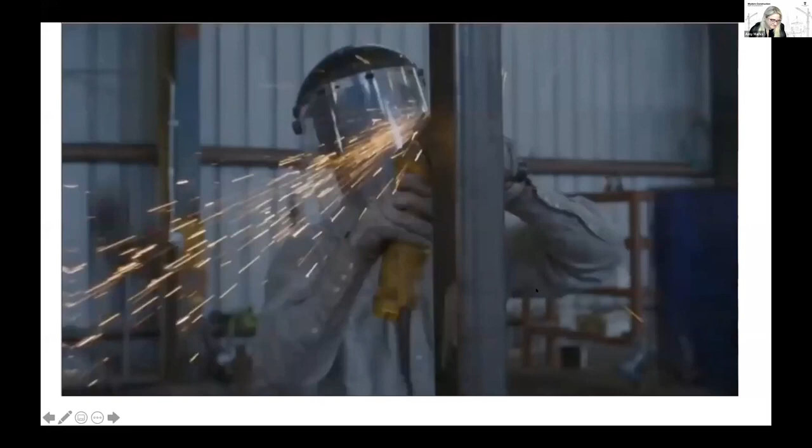So I didn't show that to you just because I have some fabulous shoes, by the way. I have to hear a lot about golf in this ecosystem and industry. So not to show you my shoes, but to tell you that there's a lot of attention around this right now. We posted those videos that are a year old on Autodesk's YouTube site. We have over 3 million views in less than 3 months. 3 million views in less than 3 months. And the majority of our subscribers in those 3 months are actually coming from those video views. And so I think that's really exciting that not only are people watching, they're learning, they want to get involved in this.

I actually work around the world, as we were just mentioning, but I think this really applies to everybody around the world, not just in the United States. You've got to know that this is a global thing that's happening faster than ever right now. And here's why. Technology is really converging. I always say, this is my phone. Can't quite see it. There you go. This is my phone. It's my map. It's my dating app. It's my entertainment. It's everything converged into this thing that I can't live without, that's in my hand all the time.

Right. And we also talk about the fact that design, make, and operate, the processes of that, are actually converging. Those silos don't necessarily exist anymore. And we're getting more and more uncomfortable with those gaps. And we see industries converging: manufacturing, design, and construction. So we don't just talk about how I build things, we talk about how I buy things and make things and integrate things, right? And if you look at what I just clicked up above, it's not just about design, make, and operate. It's about operate, make, and design, as you just heard from Microsoft. There's a reason you're hearing from the owner taking control of the situation.

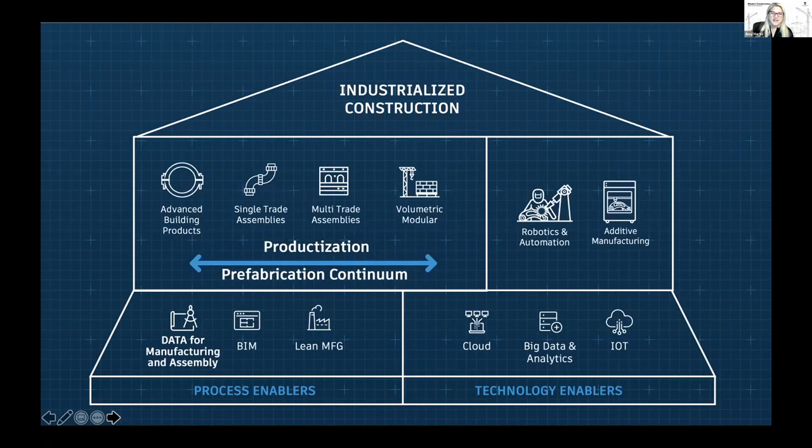Because prefabrication is sort of what happens downstream right now, this continuum. Yes, we have advanced building products and single trade assemblies, multi-trade assemblies and modules, but not the best ones we could actually make, because we allow architects to stretch them, make them taller, shorter, wider, fatter, change the inputs and outputs into something that's not manufacturable sometimes, and not manufacturable efficiently a lot of times. And so we have to, again, apply that verb of productization. So this results in products one day that inform our design, not just are at the mercy of the design.

And if you read the McKinsey report, which a lot of people quote, but not a lot of people have actually read, in my opinion, because I only hear one statement coming out of it, like 45% of our ecosystem is going to move towards industrialized construction. Well, if you read it, they actually talk about the market dynamics changing to more sophisticated owners and more requirements around sustainability, and there are these emerging disruptions. I'm only saying 4, I think there are actually 9. But I said these 4 because 66% of the survey respondents thought that industrialization and digitization are going to be the highest impact emerging trends that exist.

And then those future industry dynamics, 3/4 of the respondents said that the most important thing that happens in the next 1 to 5 years is a product-based approach and industrialization. Product-based approach in the next 1 to 5 years. We're in year 2 of this study right now. What have you done in your business to think about productizing things?

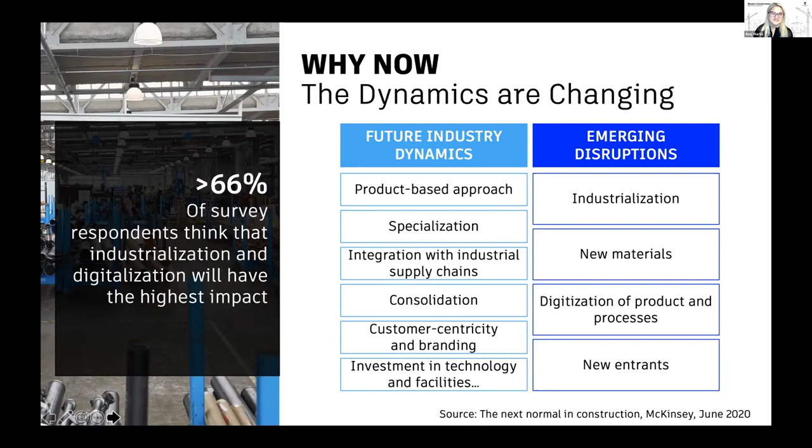So we have a vision at Autodesk, and really this vision comes in order to enable the creation of customizable, reusable manufacturing data for the built environment at scale. If you can reuse things and you can make things, we can start attaching more data to them to be reused and improved and understand more about those lead times that SPS just talked about and availability and how early do I actually need to get something there because I've done it more than once.

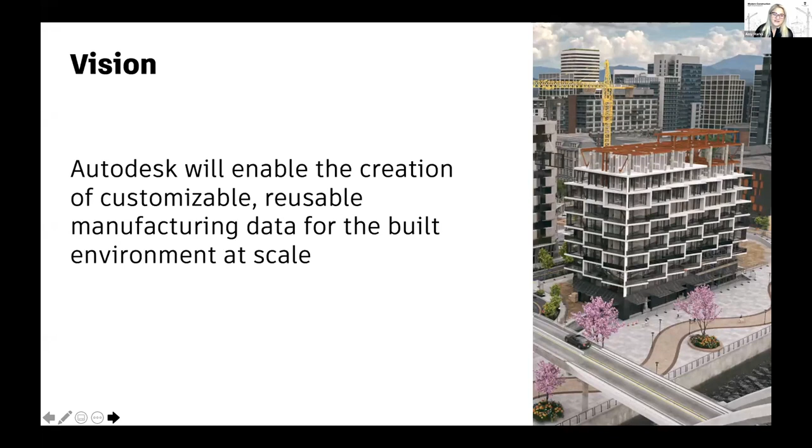And so we have to really enable that creation of this data that's so important because we have a problem. Uncertainty is truly, truly our enemy right now. If you don't recognize that, I have customers that have said for years, certainty is better than savings. You have to hear and work with those customers because those are the customers that are making the biggest changes. And design decisions right now are not informed by what can be made mostly.

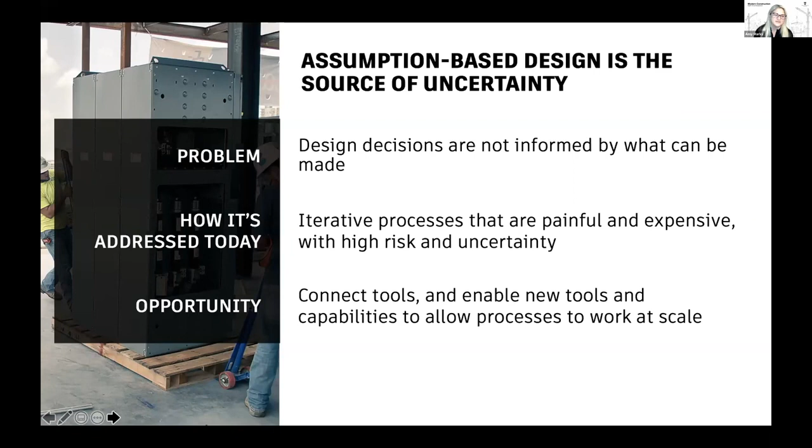How do we address it today? I'll go through that in the sad, sad story of the iterative processes that are all so painful and expensive we all have to go through day in and day out. And they have high risk and uncertainty for us. So there is an opportunity. Anytime there is a problem, there is an opportunity. And so we can connect these tools and enable new tools and new capabilities and allow processes to work at scale. I don't mean just Autodesk tools. I mean ecosystem tools. That's really important that you hear me say that.

So let's talk about how it's addressed today. This is not a fun story, but we all know that it's true. Right now, let's say somebody wants to make something. Let's talk about a football stadium. I watched a really great Monday Night Football game this week, and I'm a Steelers fan, just for the record.

But anyway, so there's bathrooms in those stadiums, and there's a battery bathroom backup behind the walls of the stall bathrooms, right? It's an assembly that nobody really cares much about. Everyone has to go to the bathroom. We drink a lot of beer at football games, but most architects could care less what the guts behind the wall of the stall bathrooms really look like. So when they have to conceptualize a building, they click on some static Revit data, something in their desktop, not in the cloud, but something that they cut and paste, placeholder allocation, some space thing, and they put it behind the bathroom wall.

There's no detailed engineering usually in some of these pieces and parts, no bill of materials, no cost, no fabrication information. And what do they do? They hand it to their fabrication manager and say, do the best you can. I don't know what else you'll do. You're constrained. And they go, well, I can make a one-off. I've never done this one before because it's like standing on my head and speaking French at the same time and patting my tummy. But I can kind of come up with something.

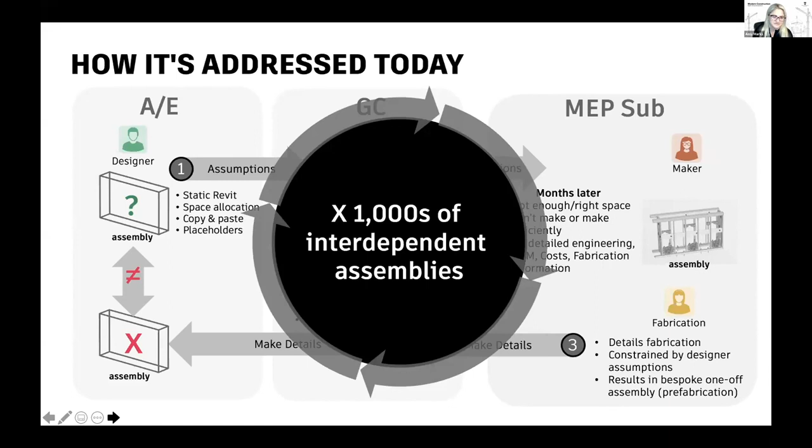And what takes priority? Listen, I've been on plenty of IPD jobs, but usually what takes priority is who's going to get paid first on what thing. We know it's about steel and long lead times and moving dirt around and things that people want to get paid for quickly and put their orders in and write their contracts around, right? But that's not helping us. And by the way, if this was a true manufactured product, I'd have to add the layer of other additional subcontractors and other distributors into this mix, and that would make it exponentially worse. They call that protecting the spec.

So now that I've put us all into despair, I will say there is a lot of hope. So if you watched Autodesk University, again, a place where lots of learning happens, our learning, other people's learning, Andrew Anagnost on day 2 in the keynote talked about how so much of this uncertainty could be addressed if we only brought manufacturing to the front of the design process.

And then architects around the world shuddered. They shouldn't, but they did. So he showed an example of Inventor to Revit connection with Scott Reese, and it was a 1-to-1 mapping. Remember those words. They showed something was designed in Inventor with constraints and parameters. It got put into Revit, and Revit made an adjustment, and it fixed the original Inventor file. Automated, right? That's 1-to-1 mapping.

That's great. It's a critical skill. We need more than that now. We need to move past that at some point. And again, future state, we need one-to-many mapping. We need one model made in manufacturing type software, ours, somebody else's, that can be consumed by Revit or AutoCAD or the design software, ours or somebody else's.

So somebody can work in their design tools, make adjustments to that bridge and get 40 instances of that bridge and send it back to the manufacturer who can now manufacture those 40 bridges because you only let them change the one-to-many mapping to what could be manufactured. Simple. We let people stretch and change things all day long that can never be made. There are no controls within the design software in that way. It was never intended to be used like that.

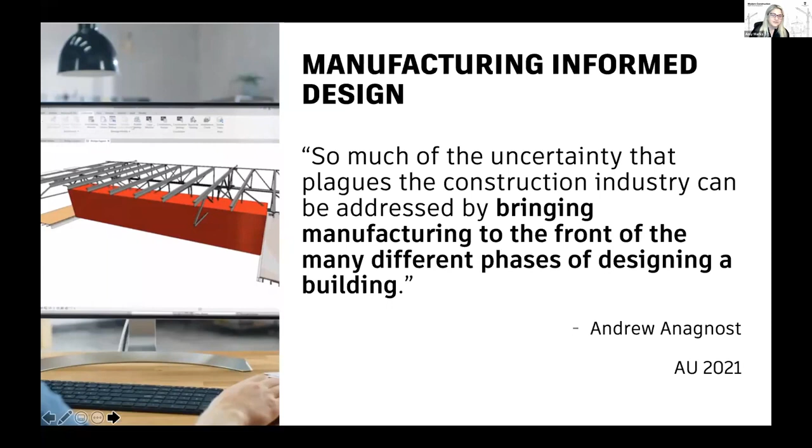And I always say, you can't make a duck into a dog. You just can't. We have to look to other tools now and other skill sets. We need manufacturing informed design, but it's not enough to have a product. And it's not one product, we just said. We have to advocate for business change.

What does that mean? Look, Phil Bernstein was a thought leader. They called it thought leadership and evangelism. I like the word advocate. I like to speak out the unheard voices in the ecosystem, synthesize them, think about my thoughts that were going into the future, and meld them into what the direction needs to be so that everyone gets what they need. And also we have to support that with change in behavior.

And so we have a convergence consulting group here now that Bridget's going to talk more about, that is about manufacturing experience and consulting experience, not just on tech, but on everything that can be applied to our space. Because ultimately, we want to make sure that we can connect making design data so that architects don't have to be database managers and that craftsmen can apply technology because they don't have the luxury not to now if they want to work at any kind of scale.

Because all we do for the most part is make snowflakes. And even if you're tracking that data and something cool, that data gets tracked and then it goes into the garbage because you never make that thing again. And you make something sort of like it, so it's not the right data, and then you track it again and it goes into the garbage or some dirty data gets to the front. We have to stop making snowflakes.

Prefabrication is stuff that happens downstream. Usually the only way we get to, when we talked about DFMA, was somebody with their mouth, like me, went to the front of the process and said, here's the best way I can make that thing in the space you allocated for it and I can fabricate it. That's prefabrication. Productization, that verb we have to do.

No architect in the world, I always say, wakes up and decides they're going to design a Kohler 217.5 horsepower generator. Why? Because it's a product. We design around products. We understand the scalable capacities of those, and we integrate them into our design. Manufacturing informed design. We do it every single day. I'm not telling you to do anything differently. It's just we need more products up front to inform that design process.

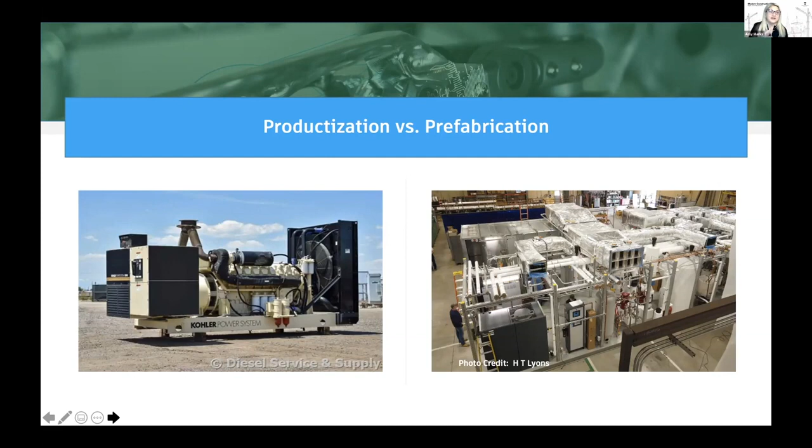And so what does that mean? And this is really the hard part, I'll tell you. You need to not only understand that you need a software to capture that in, that's mechanical CAD, but you need to understand how things are made and what's scalable about them and what the rules and constraints are. And that no software is going to tell you what that is. That comes from the makers.

And we want to not just do them one-off or repeatable. We have to define what can be made so we can manage it and then optimize those, both the physicality of those things and the workflows around them. We have to get out of this project-centric mindset. Projects are killing us. We don't get much learning on a project because it doesn't translate to lots of other things. We have to think products and programs.

That's why I love the big owners. And we know that this is happening because, by the way, GSK showed this in public at the Advancing Prefab show that's coming up again in April. And we know it's happening. Not why now. It's like it is now, really.

And at the last show we did there, we had a lot of C-suite executives and VPs. And we said, how many of you, now that we described convergence, would say, I'm a convergence customer? 82% of the audience actually considers themselves convergence customers now. And 79% of them said they were on a productization journey. A lot of the heavy MEP building applications are moving the fastest, by the way.

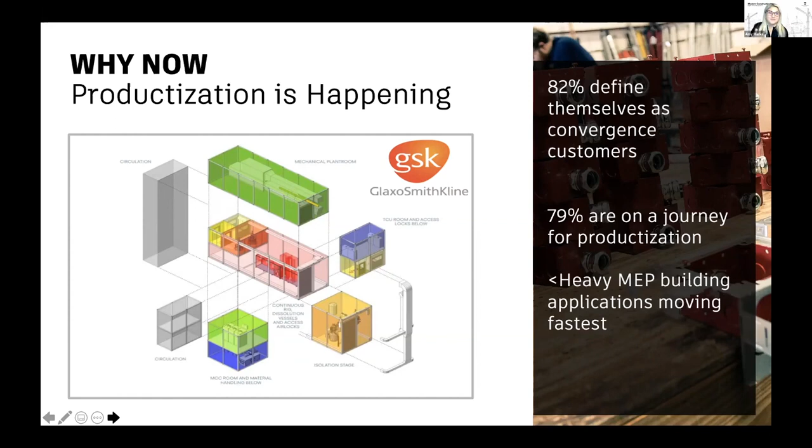That makes sense, right? The complex things that are heavy MEP and complex structure. And also because they have a lot of things to build. Nobody just builds one semiconductor plant or one car manufacturing facility, right? People always went to housing for what made sense. I don't agree. I think heads and beds are fine, but the places that have the most to gain are the ones that have the heavy MEP applications, the highly technical stuff, right? Makers also converge.

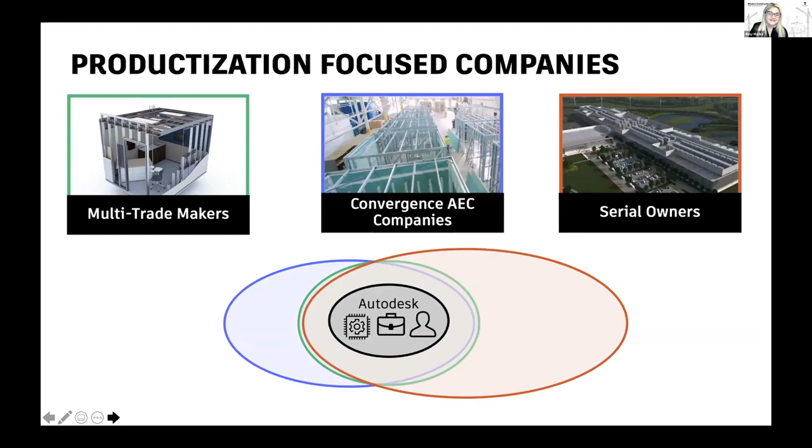And you have to remember this. We're thinking AEC now. So we're thinking all the subcontractors and general contractors and even architects. I said it, even architects now that have fabrication facilities, even owners. Shh, don't tell anybody I said that's true. But multi-trade makers are those guys, and they're the guys coming down from the manufacturing side. You have the guys consuming that data, and you have the serial owners that are owning that data. And at the center core of that, they all benefit from a connected workflow that is informing design and make, right?

Roberto, are you coming on because I'm running out of time? Yes, I am. All right, we'll give you a couple more minutes. Couple more minutes. We have no questions, so we'll go for a couple more minutes.

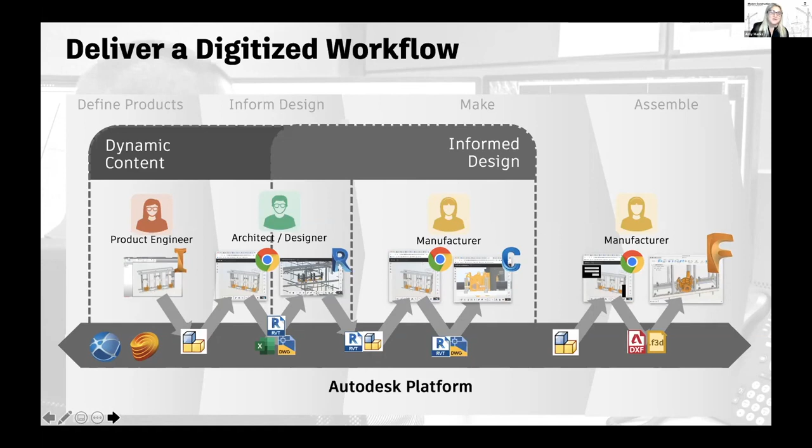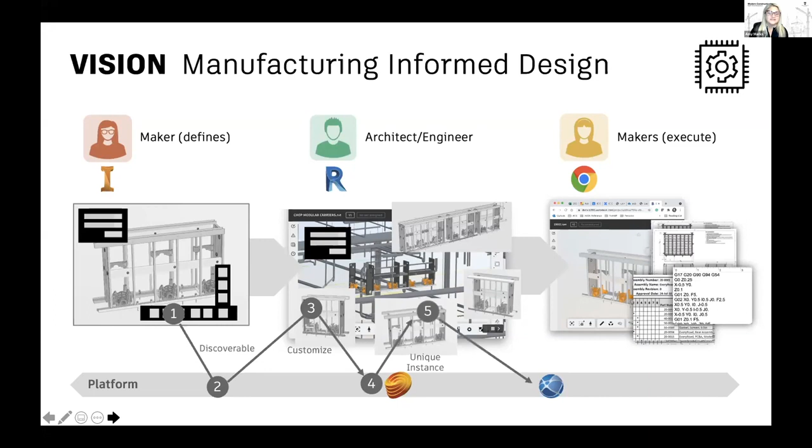We need to deliver a connected workflow, that productized workflow, so we can improve upon it. And by the way, makers have to start defining these things so architects can discover them, hopefully in the cloud, not on their desktops anymore one day, customize them, create unique instances, and have unbelievable amounts of automated outputs in many different ways. I'll go quickly about this.

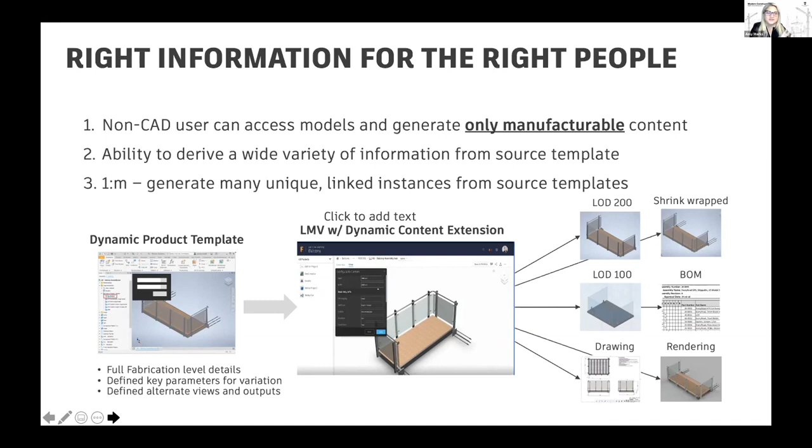The trick is you have to define only what's manufacturable. You can't do that in design software. It must be done in manufacturing software. And we only want the people that know how to do what they do in their own software silos to still work in the tools they feel comfortable in.